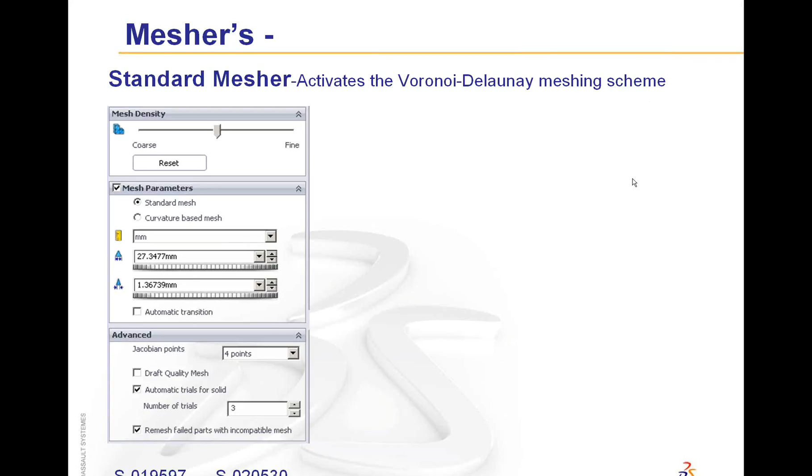To start with the standard mesher, it has a certain algorithm, it has certain parameters which a user can give, using which it will start meshing internally. Now the software has a logic by which it will derive these parameters automatically depending on the geometry, the kind of mesh used, the kind of loading present.

However, I would suggest users to be more alert on the parameters that have been used by the software. I have seen users using these parameters blindly. They will just click the reset button, accept whatever value comes over here, and mesh the geometry. Yes, it will definitely try to mesh with that particular setting, but a good understanding of these parameters will definitely help you in getting the best quality of mesh, the fastest solutions, and I can say accurate solutions as well.

So to start with, you can see over here, the first parameter is the global element size. This is one of the parameters which has to be given for the standard mesher. This global element size is the average element size that will be used by the meshing solver to mesh the complete geometry. By default there will be a calculated value. However, I would suggest a user to browse through the model, find out the different thicknesses present in the model, and arrive at a good element size.

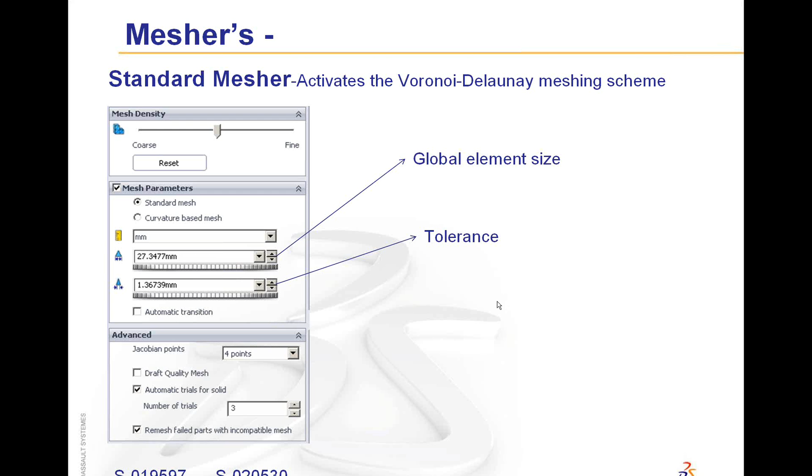So before I move on to the next slide, give me a moment. Give me a moment. I'm just browsing through the questions so that I have not missed out on any critical thing. Those questions which I can address at the end of the session, I'll keep them for the end of the session. However, if anything is important, I would like to address it now.

Okay, nothing that I need to hurry up. I can address the questions at the end.

So we have seen the global element size, the tolerance. Now let's move on to an interesting option which is called automatic transition. You can see it is present over here. Selecting this checkbox

is going to tell the solver to attain a certain quality of mesh in the sharp regions, that is wherein there are radiuses, small fillets, small elements. It will try to mesh those features with a better quality of mesh or smaller element size automatically.

Now give me a moment. There is a question which I would like to address before I go on. Just a second. Something wrong? And then a mistake in the slide that was shown on the screen, hence I'm just checking it. Just a second. Okay, now it's in place.

Automatic transition. Now this is a very good feature which will definitely mesh the intricate features automatically with a good quality of mesh. For small geometries, small parts, even I can say to some extent assemblies, it is a very good feature. But if there are too many intricate features in the geometry and we are not interested in stresses or deflections at all those features, then I would suggest unselecting this checkbox.

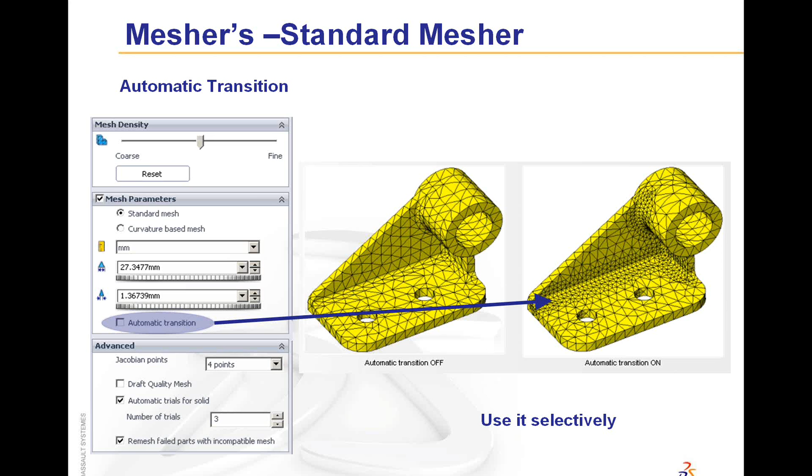We have seen that the selection of this checkbox can also lead to a mesh failure. Hence, the first thing that I would suggest when you see a mesh failure is to unselect this checkbox. Later on, you have options which I'll discuss in this presentation, using which you can attain a good quality of mesh at the intricate or the necessary regions.

However, this is going to set the setting at the global level. Hence, if permissible, neglect it.

So any questions at the moment? I don't think so. Yeah.

Let's move on. At the moment, we have two different qualities of mesh. One is called the draft quality of mesh and the other is the high quality. When we select the draft quality of mesh for shell elements, as you can see in the image over here, it will show you the three-noded shell element, triangular shell element. We call it draft quality. There are also different words like linear element. So names are different, but ultimately it will be having only 3 nodes.

Apart from that, when this option is not selected, the quality of mesh will be called high quality, and that is also called a parabolic element. So if it is a 2D element, then it would look something like this. If it is 3D, a tetrahedron in shape, then you can see it will have 4 nodes at the corners of the tetrahedron. And if it is high quality, it will have mid-side nodes at the edges of the tetrahedron.

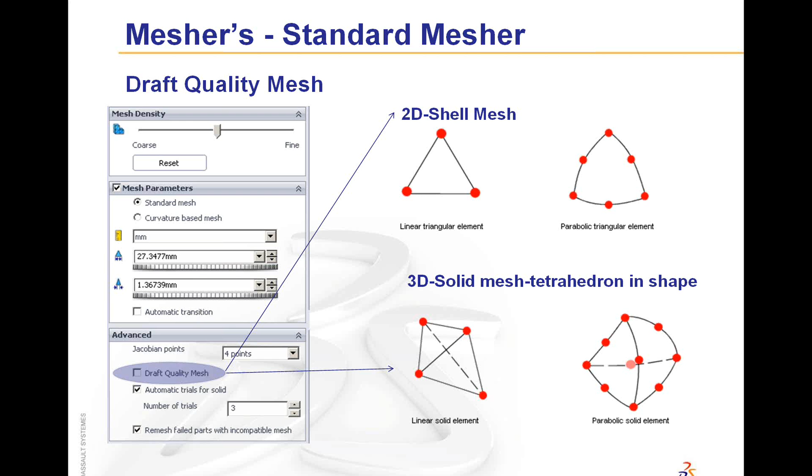But for accurate results, it is suggested to go with parabolic triangular elements. It is going to increase the degrees of freedom. However, it will assure that the quality of results is very good. Also for curvaceous geometries or geometries wherein there are enough radiuses, fillets, etc., I would suggest using the parabolic triangular elements. But it's not a rule of thumb. For initial analysis, go ahead with the draft quality of elements. If we conclude we have done the right setup, then move on to the high quality elements.

Moving on to the next option, that is automatic trials for solids. This is a very good option which will help you in case of mesh failures. If you are not sure of the element size that is going to mesh the geometry correctly, then this option can do it automatically through the software. Initially, either the software sets, or we can manually set, the global element size and the tolerance. Using this option, automatic trials for solids, we can set a certain number of iterations using which the software will iterate with different element sizes to attain the mesh.

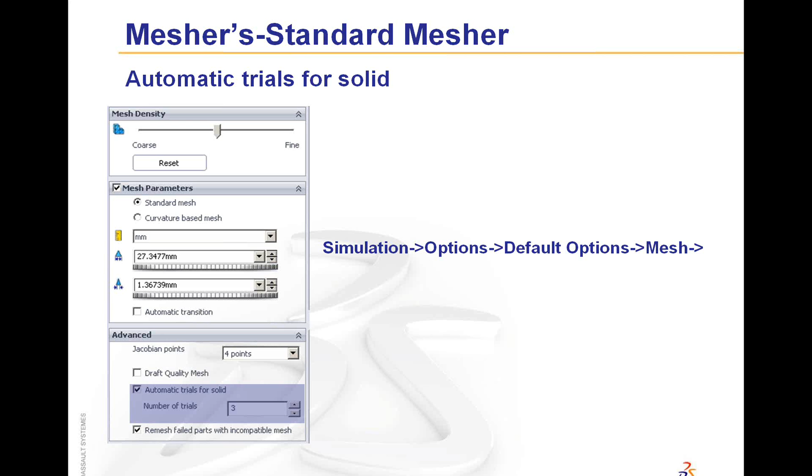Now, by default, in the property manager of the mesh, you can see we can specify the number of trials. Apart from that, if you want to specify what would be the change in element size or the change in tolerance, then you can do it through Simulation Options, Default Options, Mesh. We can see it over there.

Over there, we have the option of global element size factor for each trial and the tolerance factor for each trial. So if an element size of 25 is set over there, 25 cross 0.8, the reduced element size would be used for the next trial. So going ahead, we can just set that option and the solver will do the meshing accordingly.

So this is a very good option in case of automatic iterations for the mesh. Any questions at the moment on this particular thing? I'll just browse through it.

There is a limit on the number of trials. The maximum limit is 10, and yes, obviously it is going to take a bit of time. Every iteration will be done, hence it is going to take a bit of time when this option is selected. However, if there is an intricate geometry wherein you are not able to conclude on the mesh size, use this option and the solver will do the meshing for you.

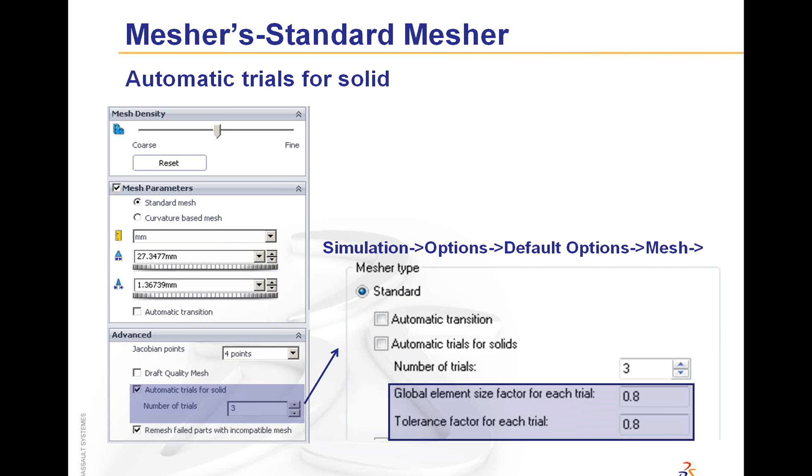Now, obviously, compatible mesh is more accurate than incompatible mesh, especially when we are seeing the results at the junction. But seeing it from a meshing point of view, compatible mesh can lead to mesh failures, especially if there are two parts of exceptionally different sizes. One of them is too big and the other one is too small. Then I would suggest using the incompatible mesh in that case.

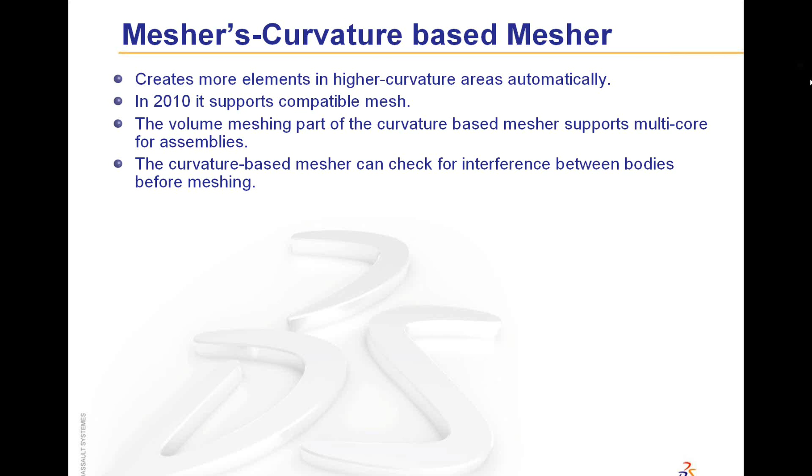Curvature-based mesher can check for interferences between bodies before meshing. So if it finds any interferences in the geometry, or rather the assembly, it will stop meshing and give the necessary warning. This is useful for a user who is not caring about interferences, where the problems come while solving the geometry. Of course, this check will happen only if bonded contact has been given, whether at the global level, the component level or the local level.

Now, the important parameters based on which the curvature mesher will do the meshing. Because this is a VAR webinar and I have seen users coming up with funny questions, I don't want to miss out on one particular observation. I have seen users practically copying the settings from standard mesher to curvature mesher. They'll just click the different radio buttons and copy the size. The first size here is maximum element size; over there it was average element size, do not miss out on that. The second is minimum element size, whereas over there it is the tolerance.

I have practically seen users who copy the tolerance from standard mesher to the curvature-based mesher and try to mesh it. So I would request you all not to be blind on the parameters that are present here. Try to have a better understanding of them. Definitely it will help you in a bigger way. So the parameters here, maximum element size and minimum element size, I think nothing much to explain there. It defines itself.

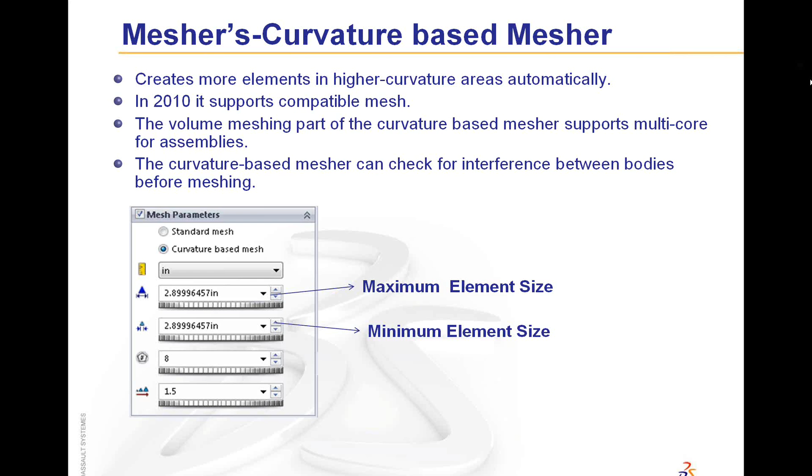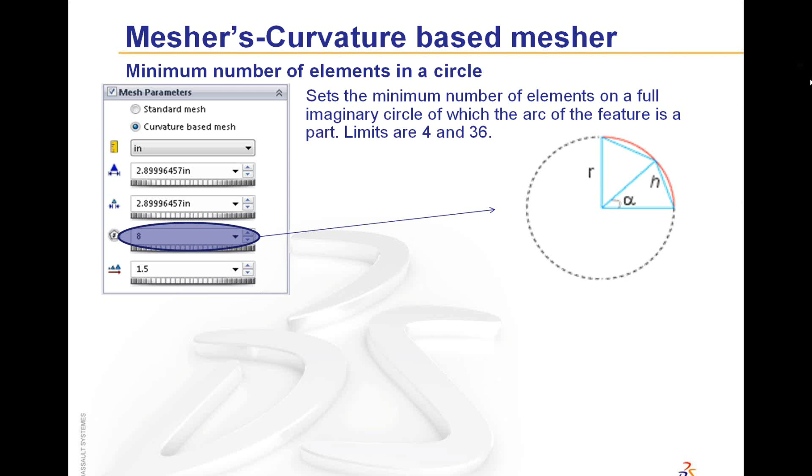Moving ahead, a very interesting and different parameter is minimum number of elements in a circle. This parameter sets the minimum number of elements on a full imaginary circle of which the arc of the feature is a part. You can see the red line on this circular diagram. That red line is the part of the geometry. Now this value, that is 8, defines the number of elements in this complete circle. The limits are 4 and 36.

If we set the value to 8, then it is going to try to attain 8 elements in this imaginary circle, and in short 2 elements in the red part of the circle, the practical feature present here. This in turn leads to an angle of 45 degrees there. The diagram should be clear in explaining that. H, the arc length, can be calculated through S equals R theta. Here it comes out to be R alpha, which is H, the element edge length.

So for this option to come into effect, the H value should lie between the maximum and the minimum element size that has been specified. This will ensure a certain quality of elements is attained throughout the geometry. This will also ensure that enough elements are created at curvature. So this is a very different, intricate option. Try to play around with it. That's all I can say at the moment.

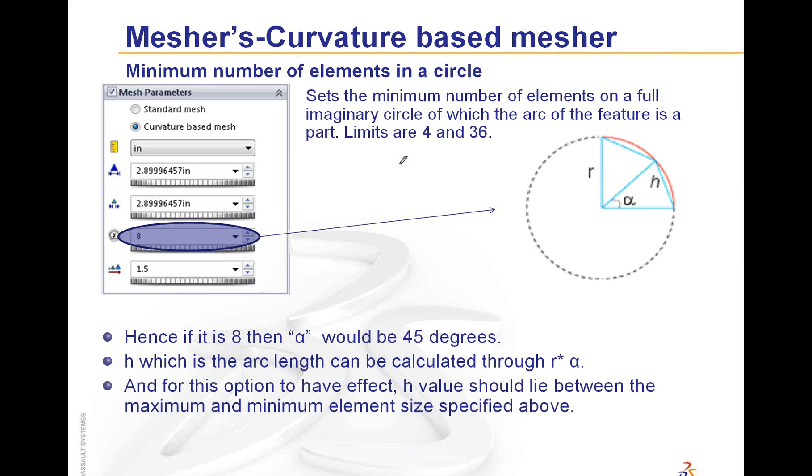Okay, I'll finish this and let's see the questions. Very simple option, element size growth ratio. We are specifying the minimum element size and the maximum element size. This ratio, the element size growth ratio, specifies how the variation will be between these two element sizes. So I think it's pretty self-explanatory.

Any questions? I'm just browsing through the questions. Give me a moment. I have two questions. As I told you, for Jacobian points there is a slide on it. I'll discuss it once that comes up.

How do we set the minimum element size? This is a very good question. There is no formula for setting the minimum element size. Browse through the model. I'm going to discuss a few tools by which you can find out small features in the geometry. These tools are going to tell you the small features that are present in the geometry.

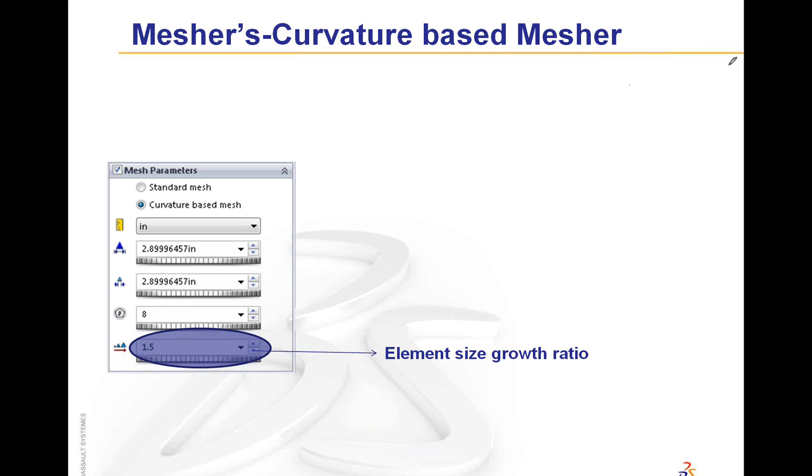Let's move on to solid mesh. There is nothing separate to discuss here. We're going to use the two existing meshers, play around with different parameters and try to attain the mesh. There is nothing separate or different to be done over here, so I'll not be discussing much on it.

Moving on to shell and beams, there are a lot of things to discuss. Before we start with shell and beam elements, we need to realize that beams and shells are an approximation to real life. They are not the 1:1 entities present in the true geometry or the practical part. Yet sometimes there will be an expectation where a user wants the same results as a solid element. No, it has its own work. There are reasons for optimizing a solid mesh to shell or beam mesh. Understand that, and go accordingly.

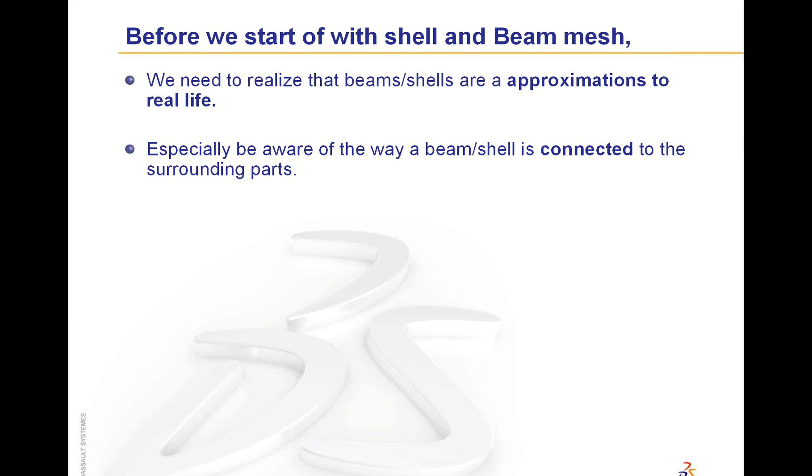Especially the points to be considered would be the way beams and shells are connected to each other and to a solid geometry. Give a thorough thought on how they are connected, what exactly a beam mesh element representation does, how the joints are connected, how the shell end is connected to a solid, etc. Be attentive to these things, try to understand them. That will give a better understanding of shells and beam mesh, or a better interpretation of the results we get from them.

The cross section of the beam is taken into account when calculating beam properties, but when bonding to a shell or solid, it is the line that is bonded to a surface, not the cross section. For a non-analyst, this might seem odd - why are we doing it this way? But that's the way it is. The physical properties or strength of the beam is considered, however it is not the beam cross section that will be considered. This is the way almost all FEA software works. The ease of use in SolidWorks simulation makes it feel like it shouldn't be that way, but be aware of these things. Once you are aware, you will be able to handle them better.

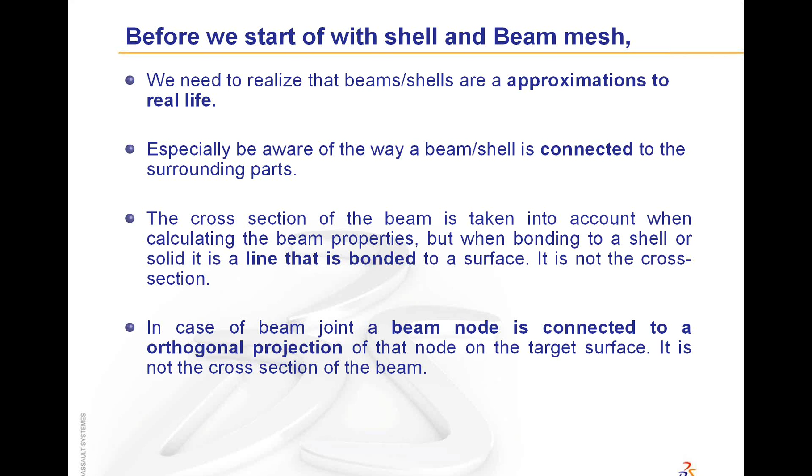In case of beam joints, a beam node is connected to an orthogonal projection of that node on the target surface - again, not the cross section of the beam. I cannot call this a limitation, but this is the way it is. If the user is not okay with this and wants more accurate results, there is no way out but to use the solid mesh as it is.

Before I start with the shell mesh, I want to go through the questions. Any other element apart from tetrahedron high quality mesh?

Two questions now. Where specifically should you use curvature based mesh? You could see a few distinctive features present in both meshes. I won't say use this mesher here and that one there, but if it's a curvaceous geometry, a large assembly with many parts, and you want multi-core processing, then curvature mesh based mesher is going to do a better job. Comparatively it's a newer mesher - standard mesher is older and has been present for quite some time with SolidWorks simulation. However, this new mesher is doing a very good job, and the big limitation of compatible mesh is no longer there. I think in almost all cases you can try curvature based meshers, nothing wrong with that. But there is no specified rule saying use standard mesher for this and curvature based for that.

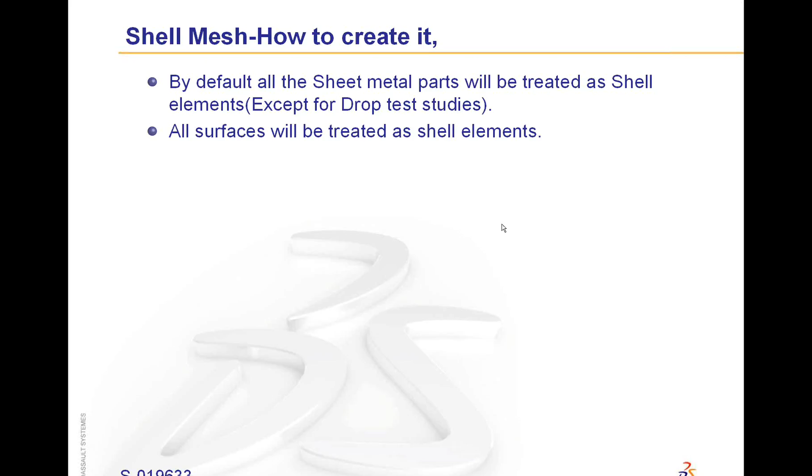Well, shell mesh—how to create it? Very simple. By default, all uniform sheet metal parts will be treated as shell elements, except for drop test studies. All surfaces will be treated as shell elements. Now, when I say by default, when we are creating a new study, automatically those parts or features will be treated as shell elements. So try to understand this.

A few users might also observe that when creating a new study in either the 2009 or 2010 version, you'll see a bit of time taken unlike before. The reason is it is browsing through all available parts to do this conversion automatically. Previously, the user had to do it manually, whereas now it's automatic—hence you might see an increase in time while creating a new study, but nothing to worry about. It's a one-time activity and helps the user in a big way. All the things are automated because of that.

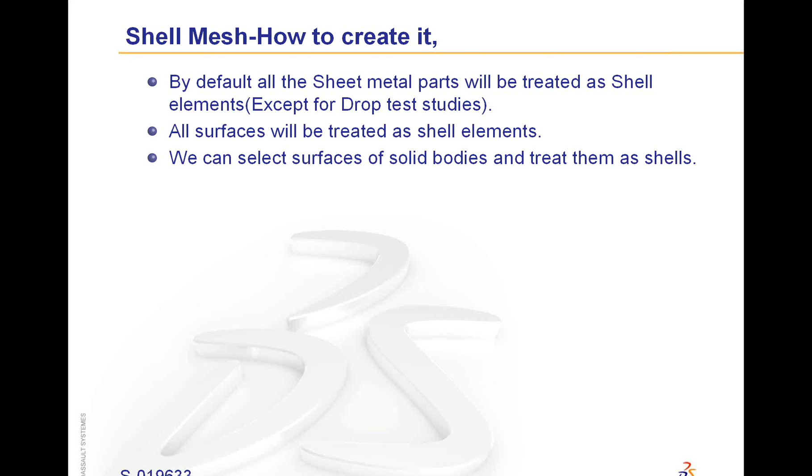Apart from that, we have a feature—first let me discuss what this feature is. We can select a surface from a solid body and treat it as shell. How to do it? Just select the solid feature which has been automatically created, right click on it, and you'll see the option 'define shell by selected faces.' Using this option we can create a set of surfaces to be treated as shell mesh.

This feature was present in the previous version, 2007-2008. However, in 2009, when we fine-tuned the front end so that only sheet metal parts would be treated as shell elements, it was removed for certain reasons, as it was perfect automation. We had given enough features in SolidWorks wherein parts could be converted to sheet metal parts, or solid parts converted to sheet metal parts, and later used in simulation. However, due to popular demand and requests from different users, this option has been reintroduced in 2010.

So if a user wants to treat a certain surface of the solid as a shell, he can use this option. Automatically the solid feature will be excluded from the analysis, and the shells will be active in the analysis. And the measures remain the same as those we have already discussed earlier.

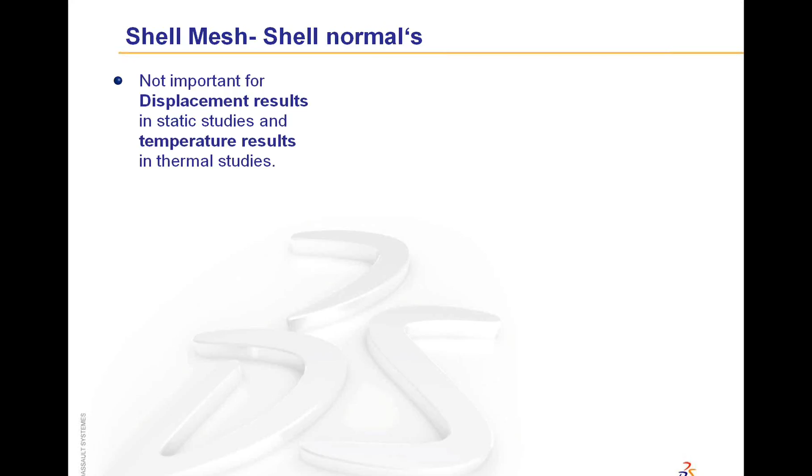Now, a very critical and important thing for shell mesh is shell normals. Do not miss out on it. However, if the user is interested only in displacement or temperature results of thermal studies, this option may not be that important. Whereas if stress results are important, do not miss out on this option, or rather, the behavior and way the mesh is created.

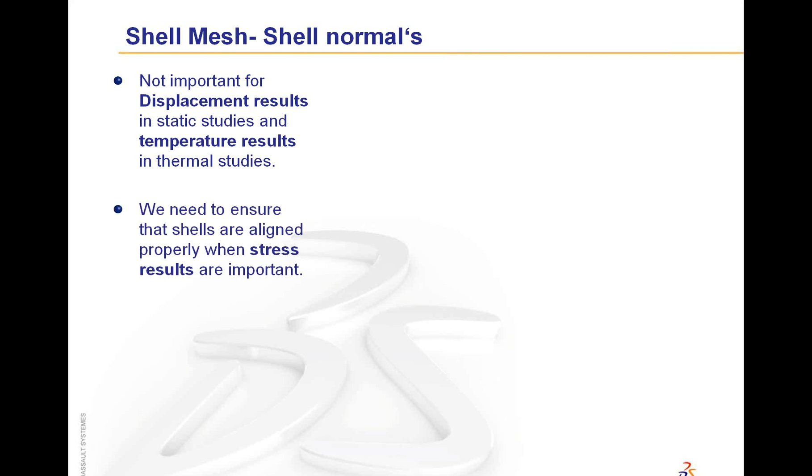By default, the software will align the shells properly if the option under simulation options, default options, automatic realignment for non-composite shells is selected. By default, the software will do our job. However, a user is suggested to browse through the model and check if all the shells have been aligned properly. This option will also take a bit of time. I have kept a different slide for that, and I'll discuss it in detail. However, at the moment, it will do it.

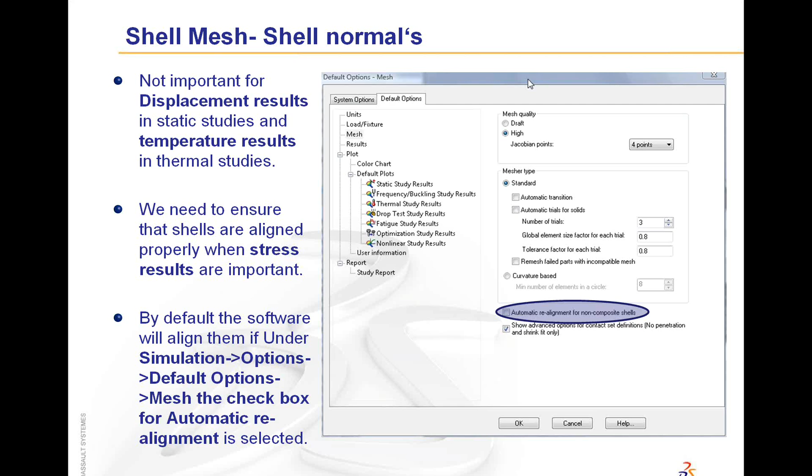In any case, if the shell is not aligned properly and a user does not want to use this option but wants to do it manually, there is an option by which we can select a certain surface, right click on the mesh, select the flip shell elements option, which will flip the necessary shells and align the shell normals properly.

Now obviously the basic question would be which direction is the top surface of the shell. Orange color will represent the bottom face of the shell, and this is the default option. However, the user has the option to change the color. It is again present in simulation options, system options, mesh color. So do not miss out on this option. Whenever there is shell mesh present in the study, ensure that the shells are aligned properly.

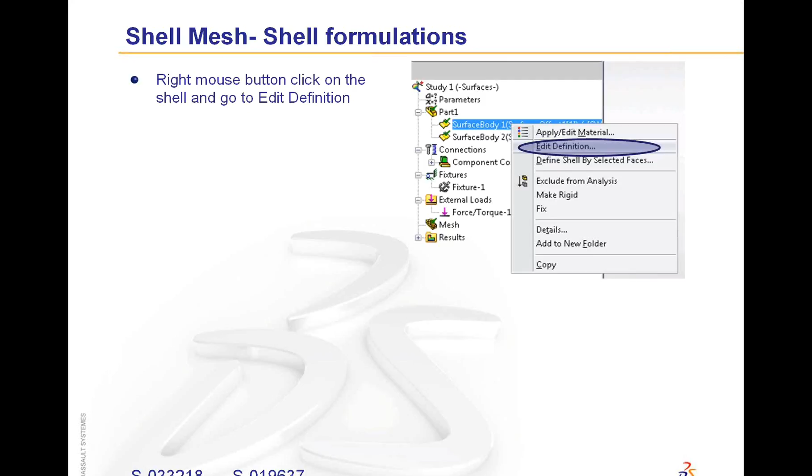Moving on, shell formulations. Now this may not be a pure meshing thing, but yes, this has to be considered while meshing. Hence I am covering it in this presentation. When you edit a particular shell that has been defined, you'll get different formulations. One of them is thin shell formulation, the other is thick, and finally composites.

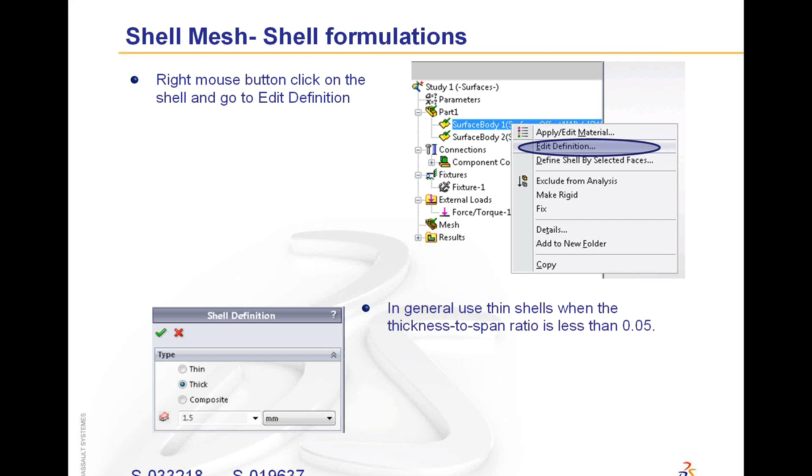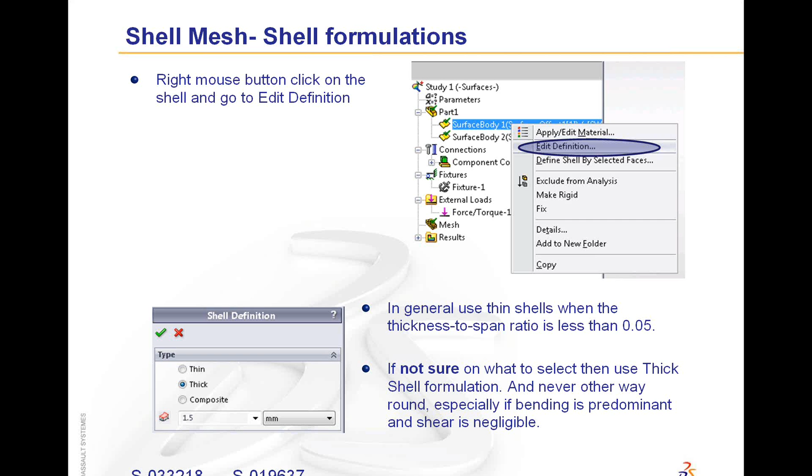So in general, use thin shells when the thickness to span ratio is less than 0.05. Be aware of this, thickness to span ratio less than 0.05. However, if a user is not sure if the thickness is more than that, then go ahead with the thick shell formulation. If he is not sure and does not know which to select, there is nothing wrong in blindly selecting the thick shell option. For more details, browse through the solution; there are enough theoretical things over there that should be of use to you.

Moving on, the third formulation, which is composites. This again is a very big chapter. I am going to discuss more on the application part of it, or the options that are present here. It can take me a complete hour to discuss composites in detail. However, be aware of a few things and you can start off using it with these options explained.

It is available in static, frequency and buckling studies only. To start off with the different options when we select composites under shell definition, the first one is the sandwich option. Here you can see that by default the shell is considered to be having 3 layers: the central layer which is the core, and 2 skins present on this central layer which represent the composite. I will not go deep into it; there are many things to be discussed, but that's what I'd like to say at the moment.

We can define the number of plies, or if not, when the sandwich option is not selected, you will get this option of total plies, where we can define the number of plies that you want in the composite shell. Moving on, the symmetric option lets us specify the number of plies and whether they are symmetric with respect to a central layer or not. If not symmetric, there can be variation of thicknesses of the layers on both sides of the central layer, or even variation of the material properties.

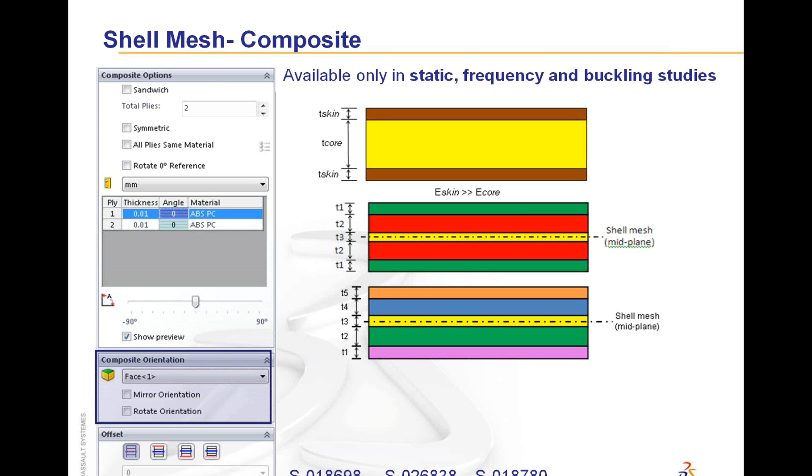Moving ahead, composite orientation, that is just now what we discussed, the shell normal thing. Either they are oriented on the positive Z direction or the negative Z direction. We can set it over here. And finally, the offset, that is the location of the mid-plane. Either it can be at the middle, top, bottom, or we can specify a fraction of the total thickness measured from the mid surface to the reference surface, using which we can specify the location of the composites.

Now I have covered almost what I should have discussed in 1 hour in 2 minutes. However, that's what it is. Solutions should help you. Do not miss out on those solution numbers.

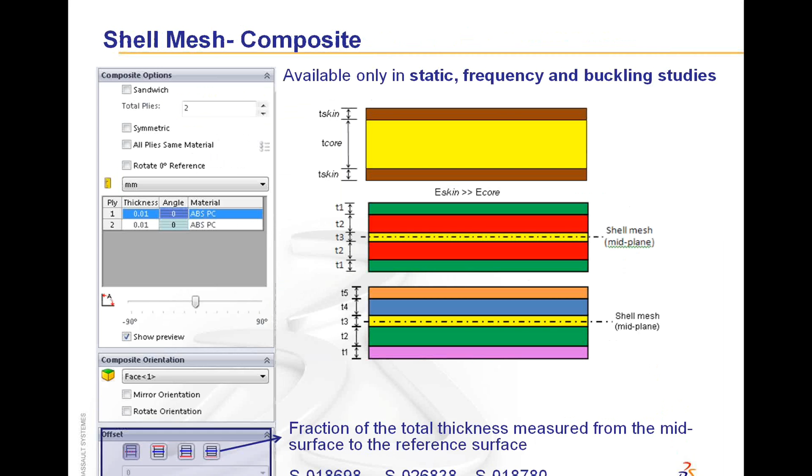As I told you, for composite orientation, the shell normals are very important, especially when we are setting the composite orientation tab over here. Ensure that the shell normals are aligned properly for composite elements. Rather, if composites have been used, then ensure that shell normals are aligned properly.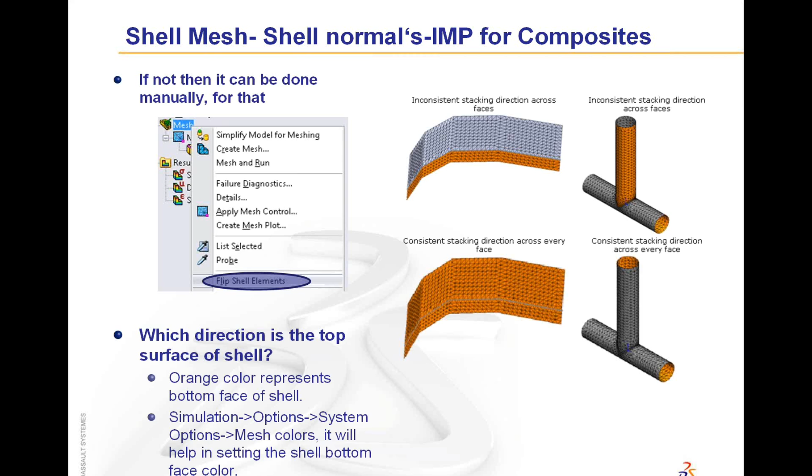So moving ahead, the next type of element, beam mesh. Now again here, by default, all weldments will be treated as beams. Beam elements are supported for static, frequency, buckling, and nonlinear studies. Nonlinear is an addition in 2010. Large displacement solutions in static studies are not supported for beams. There is no separate control on the way the mesh is created. That is, we don't have any mesh controls, element size, etc. The software will do it on its own.

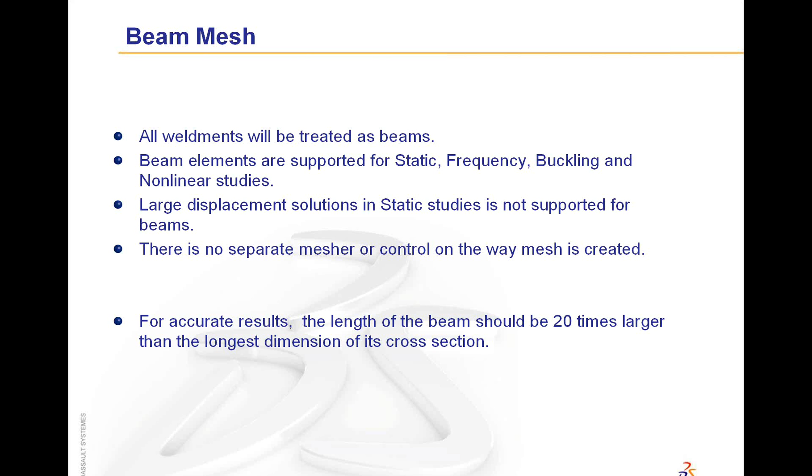Now moving ahead, this is more of a theoretical concept, but we do not want to miss out on that. For accurate results, the length of the beam should be 20 times larger than the longest dimension of its cross section. So do not miss out on that. That does not mean that we cannot have beam elements with smaller length, but this is also a reality.

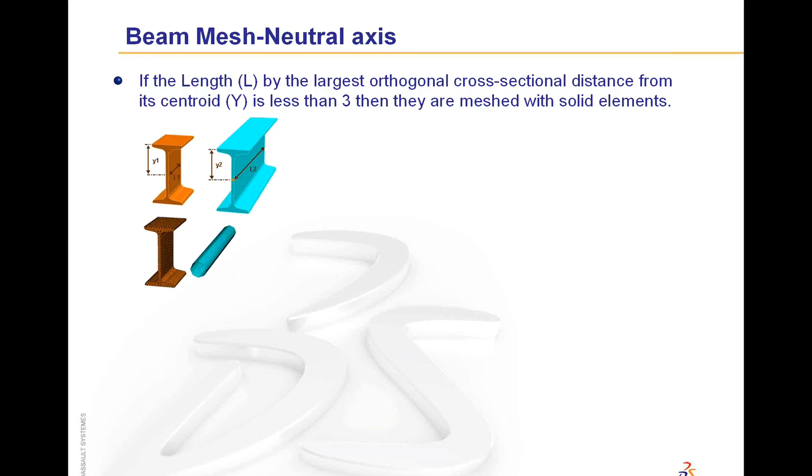Now again, when we are speaking of by default and when the software converts beam elements to solid mesh, in the 2006, 2007, 2008 versions, etc., it was left out and automatically all elements were converted to beam elements. However, from 2010 it has been very well fine-tuned, and by default, if the length divided by the largest orthogonal cross-section distance from its centroid, Y, is less than 3, then they are meshed with solid elements. So by default, when we create a new study, any such combination wherein the L by Y ratio is less than 3 is treated as a solid element.

However, that does not restrict the user. If a user in whichever case wants to treat it as a beam element, then he is free to do it. Obviously, the software will face problems wherein it does not know. Now I have taken an example of a perfect cube. There is no chance the software can know which should be the direction of the beam element. However, we can treat it as a beam element, and when we right click on the beam, there is an option called define beam neutral axis. Using this option, we can specify the direction of the neutral axis. So even with all the restrictions present, if a user wants to move ahead with a beam mesh for a certain kind of solid, then he can do that.

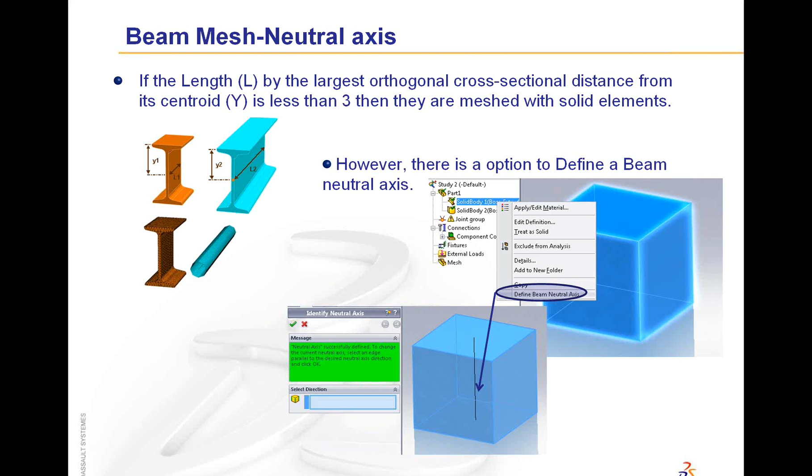Beam properties: when we right click on the beam, we have the edit definition option, which will permit us to give the beam properties. The beam can be treated as a beam or it can be treated as a truss. Beam will have 6 degrees of freedom and truss will have 3 degrees of freedom, that is translations only. Apart from that, if we have selected the beam option, then we have the option of playing around with the end connections, wherein we can say it could be rigid, hinged, sliding, or we can do it manually also.

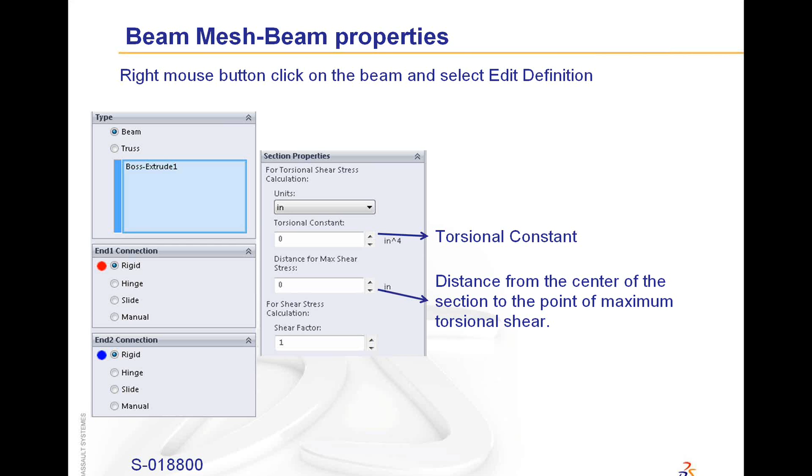Apart from that, from 2010, if a user wants to study the torsional behavior of a beam, then we have more properties which can be given, using which we can check the torsional stresses and deflections. However, it needs certain inputs to be given for beams. One of them is the torsional constant. The below solution should be useful in understanding these parameters in more detail. Distance from the center of the section to the point of the maximum torsional shear. And finally, the shear factor, the ratio of effective area under shear to the beam's cross-section area.

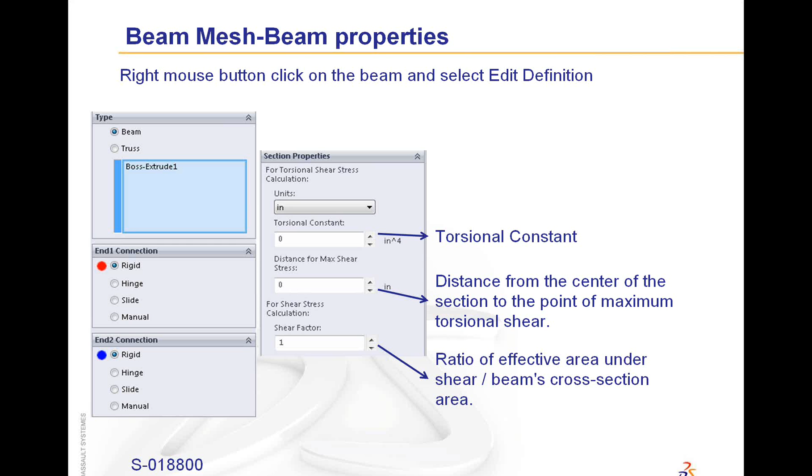So we need to specify these parameters if a user has to study the torsional behavior of the beams as well. Finally, solids, shells, beams. A user wants to mix up all those things; rather, almost all intricate assemblies will be this way, and a bit of discussion on that thing.

As I told you, on creating a new study in an assembly, and not only assembly, it is true for a multi-body part as well, there can be a multi-body part with surfaces, solids, and weldments as well. So by default, all sheet metal parts of uniform thickness will be treated as shells. Also surfaces, there is no choice for surfaces. All surfaces will be treated as shells. Weldments will be treated as beams. Exceptions, we have discussed already in the previous slides. All other parts will be treated as solid.

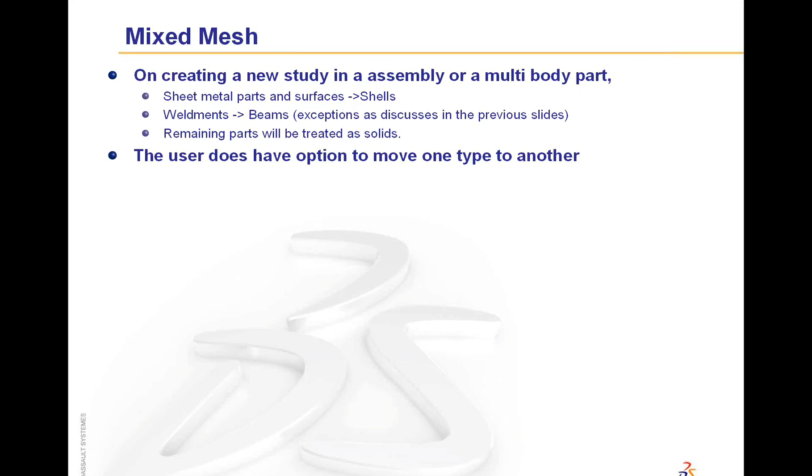Now this is what the software does on whatever understanding it has. However, the user has the option to move from one of them to another. Surfaces, nothing much can be done. They will be treated as shell elements. We need to specify the thickness of surfaces. Whereas if it is a shell mesh which has been created from a sheet metal part, then we have the option of treating that sheet metal part as a solid or as a remote mass, or what remains, that is the shells.

Moving ahead, for solids, we can move them to beams, remote mass, or shell. And for weldments, we can only move them to solids. They cannot be treated as surfaces.

Now, give me a moment. I've covered quite a few slides, so I'll check if anything important needs to be addressed immediately. I'll browse through the questions. Give me a moment. Okay, a few questions which I would like to address quickly.

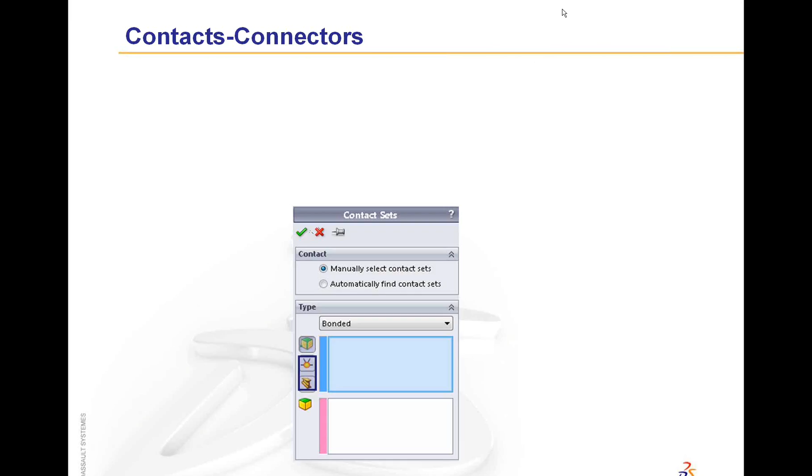Connectors. So as I told you, a very important thing while having mixed mesh is connection between shell, solid, surface, solid, etc. When we are bonding, the contact set manager has an option wherein we can bond vertices, edges, faces, joints, and the complete beam can be bonded to either the surface of shells or solids. Now, frankly, there are a few cases wherein it is not possible to bond, and there were a few cases wherein the software did not warn that this bonding is going to fail and we need to neglect that thing.

But however, I would say in 2010, it has been fine-tuned a lot. The software has enough control on what the user is selecting. It will pop up enough warnings to tell you that this particular connection is not supported, etc. So that's the way it happens. However, it has been fine-tuned enough.

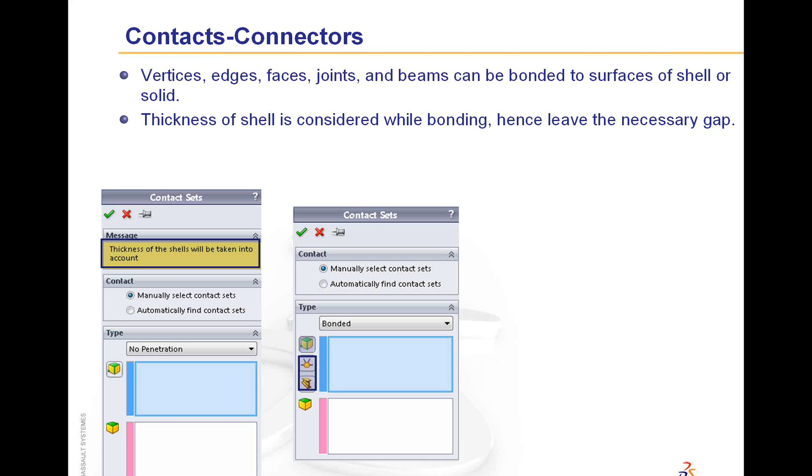Ideally we can connect this set of solid joints, but be aware of a few things wherein the thickness of shell is considered while bonding. Hence, leave the necessary gap. Now, if it is a sheet metal part, obviously that gap will be by default present. However, if it is a surface thing, then that gap will not be present, and a user will be required to leave that gap appropriately.

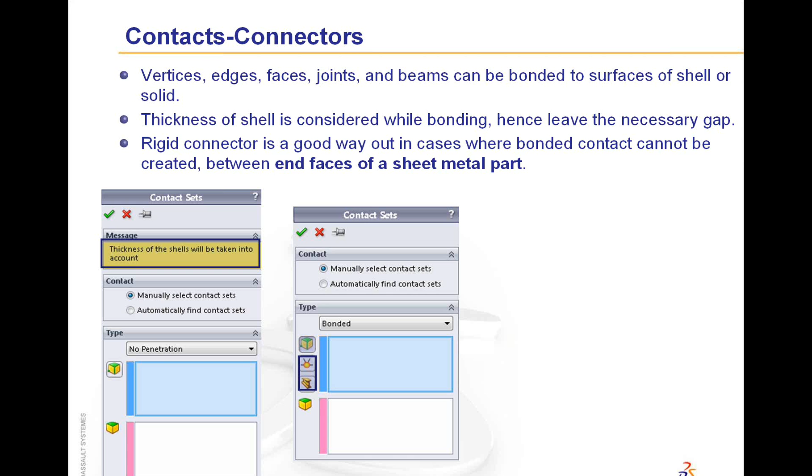Finally, there is a case which I would not miss out on, wherein we cannot connect end faces of a sheet metal part using bonded contact, and I would suggest using the rigid connector over there. That would help you in connecting the sheet metal parts. There are few reasons why the bonded contact is not present, but the rigid connector can take you ahead.

Behavior of the bond: as I told you, contact is very important. Try to see the way a beam element is connected to the solid, etc. The connection is very important there, especially if you are interested in seeing the stress and deflections at those adjoining points. So the behavior of a bond depends on whether the source entity belongs to a solid or shell. If the source is beam or shell, then the connection will be rigid. If the source is solid, then the connection is like a hinge. Solid has 3 degrees of freedom and shell and beam will have 6 degrees of freedom, and hence the connection will be a hinged thing.

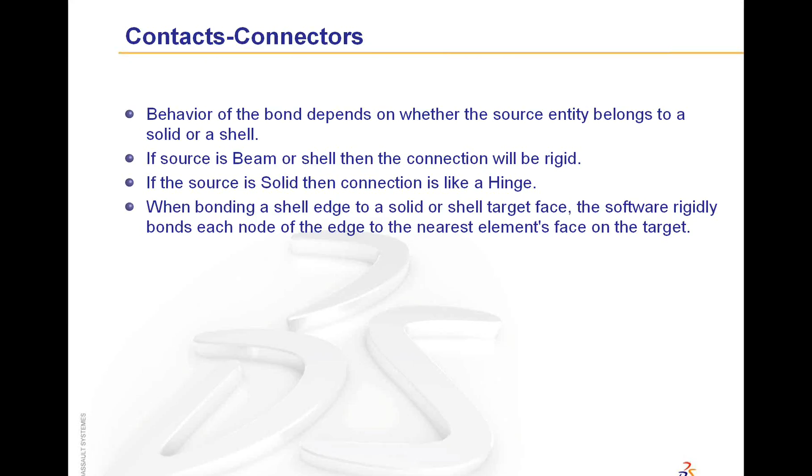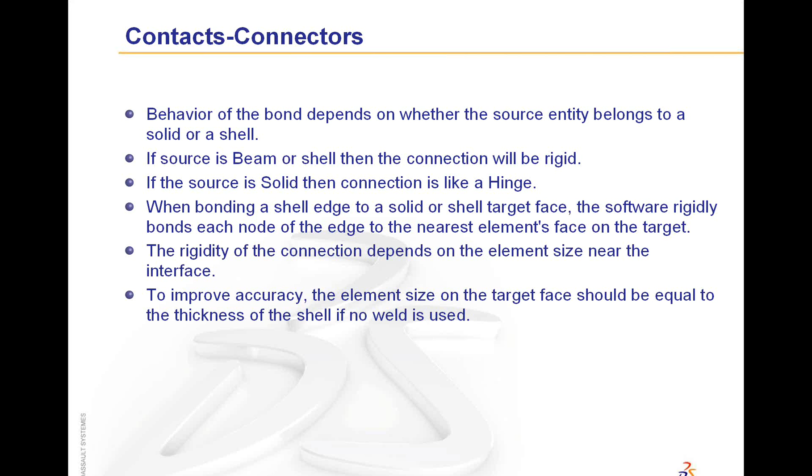When bonding a shell edge to a solid or shell target, the software rigidly bonds each node of the edge of the shell to the nearest element face on the target. So the rigidity of this connection will depend on the element size near the interface. If it is too small, then you might see a few stress singularities at that junction. Hence, it should be at least equal to the thickness of the shell to have more appropriate results. To improve accuracy, the element size on the target face should be equal to the thickness of the shell if no weld is used. If a weld is used, the element size on the target face should be equal to the weld size. Lot of points.

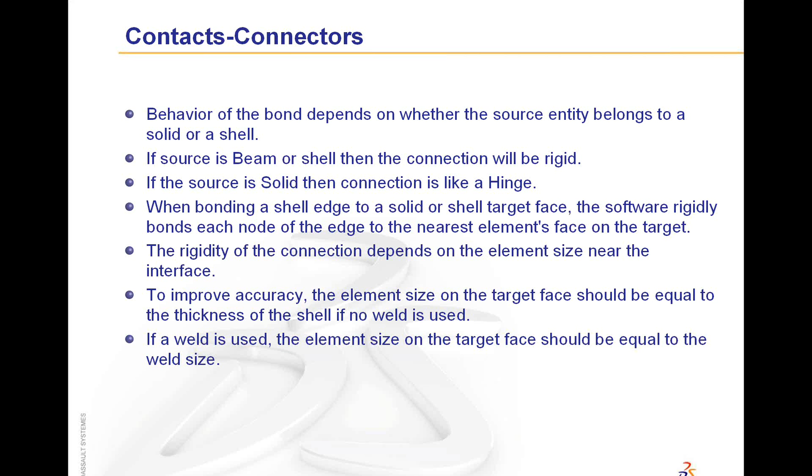I'm sure you'd like to have a look at this slide later on. However, as I'm running out of time, first of all, I apologize. I might overshoot the 1 hour that has been given to me. However, I am sure the slide should be useful to you. I'm going to hurry up now a bit.

Now that we have meshed it, connections are created. A user would obviously be interested in finding out the quality of the mesh that has been created. And we have two options. When we right click on the mesh we'll get the create mesh plot option. That will give us an option to select either aspect ratio or Jacobian check. These two checks have been given to check the quality of the mesh.

It's not specified anywhere that the aspect ratio should be so much only to get the results. However, for accurate results, people try to maintain their elements with an aspect ratio of less than 5, and it is permissible up to 20 as well. So I do not want to put a borderline, but that's what it is.

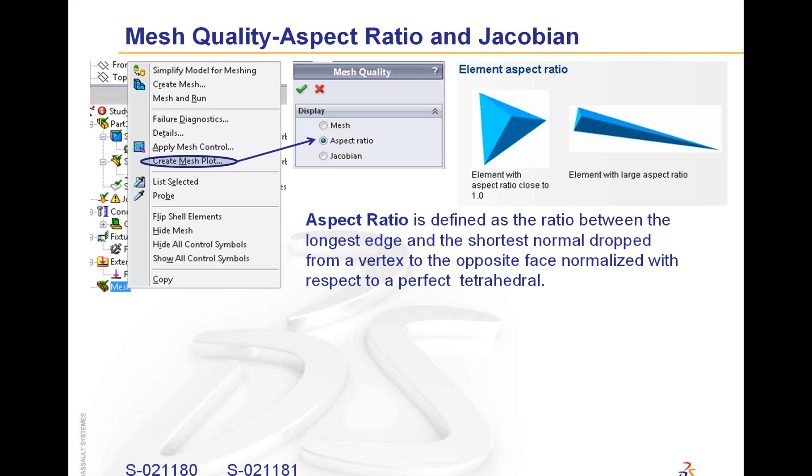And Jacobian measures the displacement of the mid-side nodes and is available for high quality mesh only. The software gives the option to check the Jacobian based on either 4, 16, 29 Gaussian points or at nodes. A negative Jacobian will lead to a solution failure.

Now, this is an interesting thing. By default, the mesher is going to do this job. A user is not required to do much. Obviously, if there is a negative Jacobian, the solver itself will stop. So do not worry too much. You will get the error message.

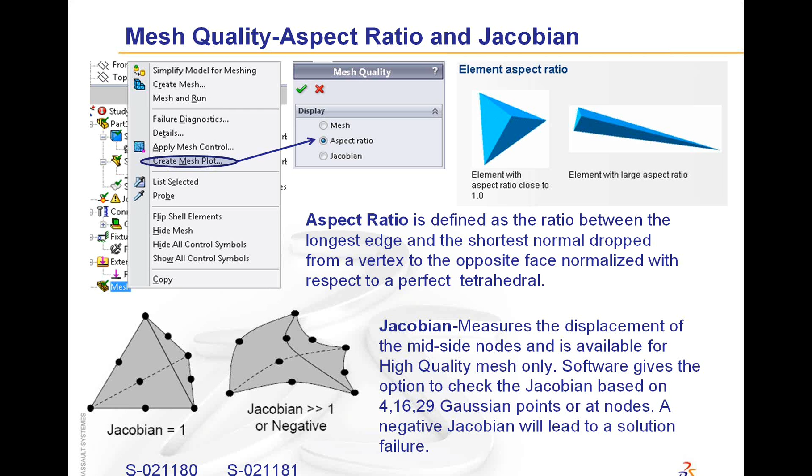And while meshing itself, we have the option of selecting what kind of Jacobian check to use, the number of Gaussian points, or at the nodes. We have the option in the meshing property manager itself. So again, the mesher will do this job. However, we have this option by which we can see the Jacobian variation throughout the mesh, and there are many benchmarks. However, I can say it is permissible to go up to a Jacobian of 40. So that's what it is.

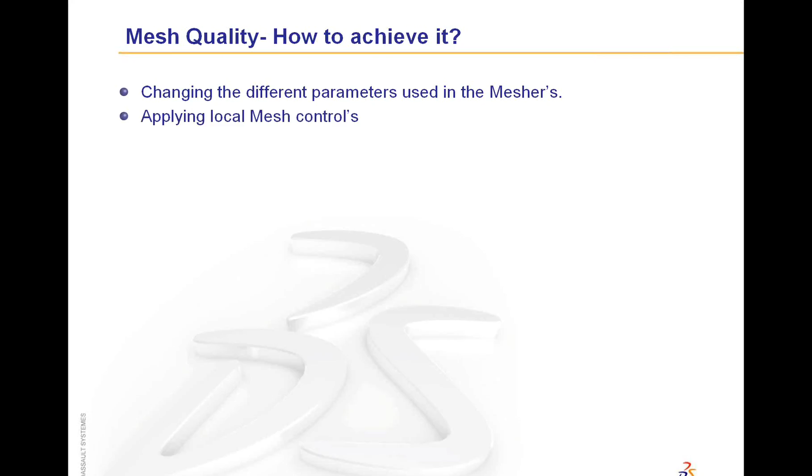Now, if your mesh is not of this quality and you want to improve it, changing the different parameters used in the mesher will help you do that. We have already discussed the different parameters. Apply local mesh controls: we'll discuss it now, wherein we can apply a local mesh control to improve the mesh at that local place only. It is present on right clicking on the mesh feature in the study. You will see the option of apply mesh control. We can apply it on the vertex, edge, surface, or at the part level.

We can specify a different element size and the variation of the elements from that element size onward. And the mesh control can be at the vertex, as you can see over there, or at the edges, at the surfaces, or on the geometry component level. So using these options, a user can attain the necessary quality of the mesh. So that's what it is.

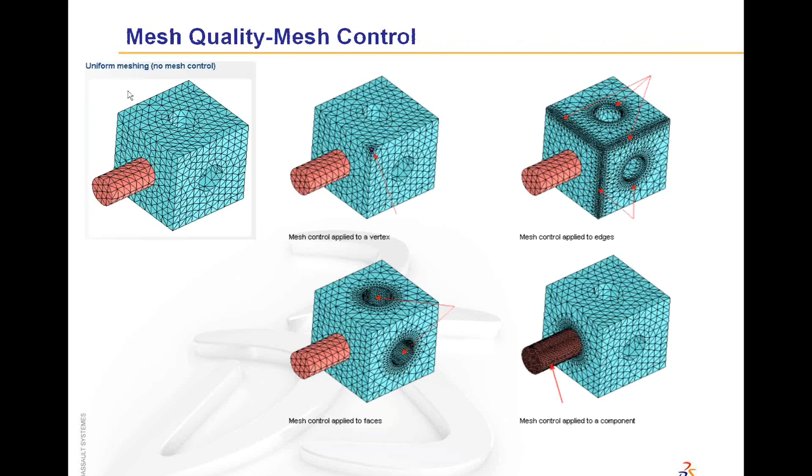Now, the next question would be: okay, I have done the meshing. Is this the optimal mesh? Is the solution time taken too huge? Is this what I should spend on this geometry? Have I attained the necessary mesh convergence? What mesh convergence is, we'll discuss in more detail now.

Any change in a global mesh parameter will lead to a uniform change throughout the model, and hence a huge number of elements if we are reducing the element size. Normally I have seen users who change the element size at the global level only, and that is going to give a uniform mesh size throughout the model, a large number of elements, and huge solution time. Yes, we can do it blindly, but for an intelligent user, I would not suggest doing that.

What he can do is use local mesh controls as discussed in the previous slides. Use draft quality elements and refine the mesh in the localized regions only. Draft quality elements will automatically reduce the degrees of freedom throughout the model, and later on we can apply local mesh controls to refine the mesh in the local regions only.

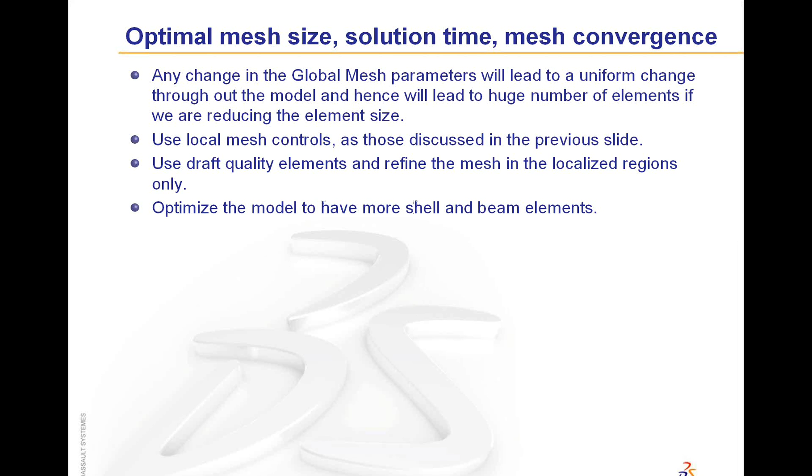Optimize the model to have more shell and beam elements. Now this is a controversial thing. Optimization has to be done based on your experience of the practical results. But for accurate analysis, or if you want a faster, smarter way of analysis, do not miss out on that. Do the optimization of the model.

Finally, mesh convergence. Many people do it normally. This is a graph of element size versus von Mises stress. If I use an element size of 10, it will give a certain stress value. Moving ahead, I reduce the element size and get another stress value. Moving ahead, there is a little increase in stress, not too much. Moving ahead, it has increased comparatively a lot.

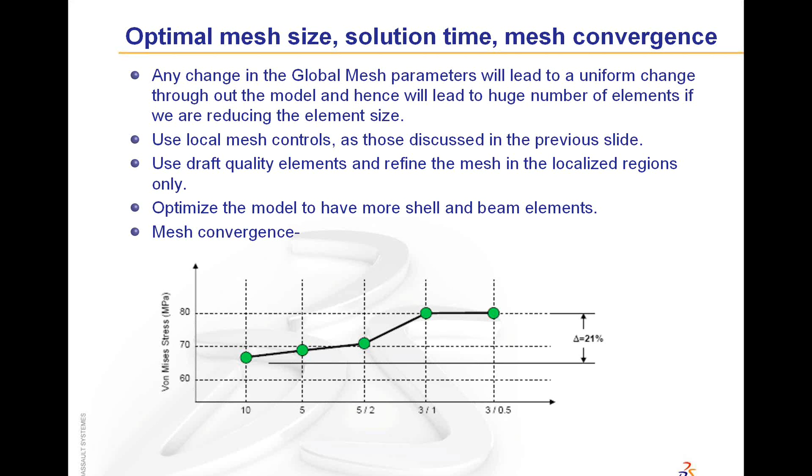So you can see there is a certain amount of variation when you are reducing the mesh size up till this value. However, when we reduce it further, there is no change in the results. So this is the mesh that you want. So element size of 3 is more than enough for your present geometry. Rather, if it is an accurate final analysis, then I would suggest every user to do this one: H adaptive.

Now what we are discussing is how we are going to achieve quality results by using different meshing techniques, or better mesh quality, different controls on doing that. And these two automatic adaptive methods, that is H adaptive and P adaptive, are present at the solver level. You can explore them in more detail through the below solutions and use them to get the necessary quality of mesh.

So what H adaptive method does is it will reduce the element size in regions with higher errors, and we have the option of specifying the accuracy of that error. Set the accuracy level for the strain energy norm. The below solutions will definitely help you in understanding what strain energy norm is. So we can set the accuracy level that we want to attain.

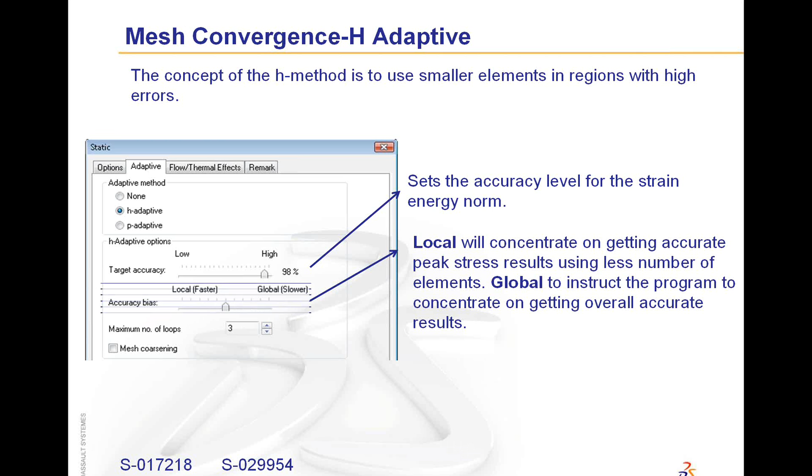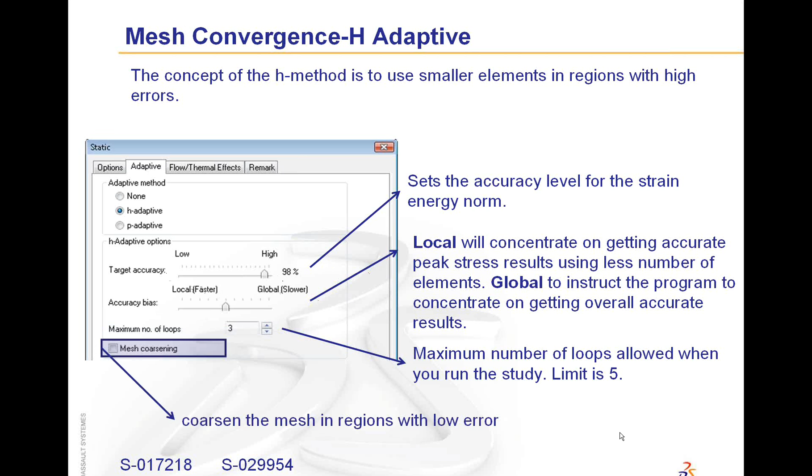We can specify the accuracy bias, that is, either we can improve the mesh at the global level, or we can improve the mesh at the local level only, and this bias is specified over here. We can specify the number of loops. The limit is 5, that is, it can do up to 5 iterations to attain the level of accuracy that you have specified. Apart from that, we have the mesh coarsening option, using which we can coarsen the mesh in regions with lower error and improve the mesh in regions with higher errors.

Finally, the second method, which is the P adaptive method. Now here, no remeshing of the object occurs. However, the quality of elements is improved. How is it improved? The polynomial order used in each element is improved. Again, there are different error norms which we can specify. We have the total strain energy of the complete model. We can select either total strain energy, RMS von Mises stress, or RMS resultant displacement, and set the permissible error. And we have one more control, that is update elements with relative strain energy error.

Now moving ahead, as we discussed, we have linear elements and quadratic elements. These elements can move to a higher order, that is second order up to fifth order. This is the limitation, 2 to 5, and only those elements which are not giving the necessary accuracy will be improved using this method, a localized improvement of the quality of the elements. So we are specifying the starting P order, or the order of the polynomial, the maximum order, and the maximum number of loops.

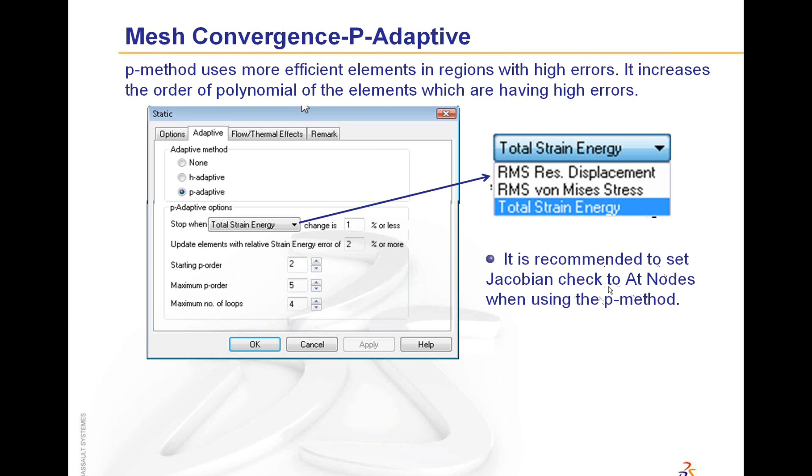Now, a small note over here. It is recommended to set the Jacobian check, which we discussed previously, to at nodes. As I told you, we can specify 4, 16, 29 Gaussian points, etc. We need to specify it at nodes when using the P method, because we have seen solution failures, and instead of facing this problem later, it is better to do it while meshing itself. Hence, set it to at nodes.

A few limitations of the P method. The P method works with solid elements only. Shells are not supported. Beams are also not supported. It does not work with non-uniform pressure, non-uniform forces, or multiple pressures defined on a single face. So that's a bit of a limitation.

Well, when not to use adaptive methods. I should not say this has to be done, or these are the guidelines, but these are a few observations which I have got from the technical support queries that are issued. Sorry. Models with stress singularity. At least do a single analysis without using the adaptive method. If there is any stress singularity in the model, then do not use the adaptive method.

Models with large number of contacts and connectors - obviously, if you are using the H adaptive method in such a case, it is going to shoot up the number of elements that are used.

And I missed out on something. In case of stress singularity, the error is going to increase as the iterations are done. The number of elements will increase, and the mesh convergence will not be in the right direction. Instead of converging, you are diverging if a stress singularity is present in the setup.

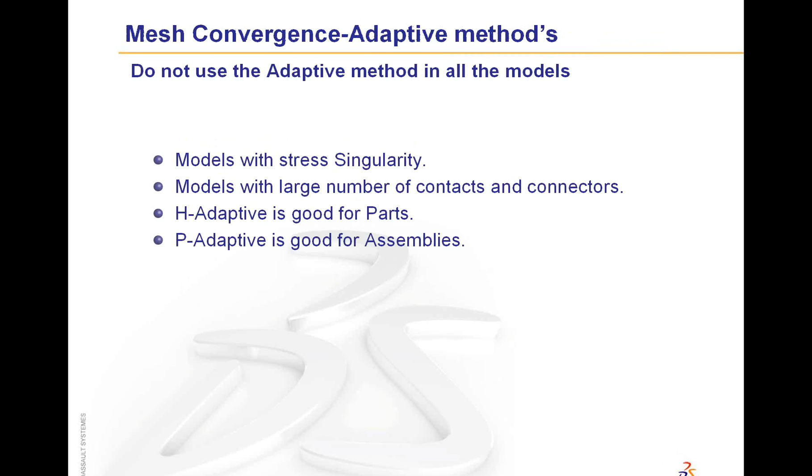So moving ahead, a tool which I do not want to miss out on. Obviously, people want to attain or use the geometry as it is. However, from an analysis point of view, if a certain feature is not going to reduce the strength of the geometry, do not miss out on this feature.

Simplify - when you right click on the mesh, you have this option of simplify model for meshing. Using this option, we can get a list of small fillets, chamfers, holes, extrudes, revolves present in the geometry, and we can either suppress them or create a new derived configuration after modifying these small changes. This helps you have a model with fewer elements, fewer degrees of freedom, and a faster solution without affecting the results.

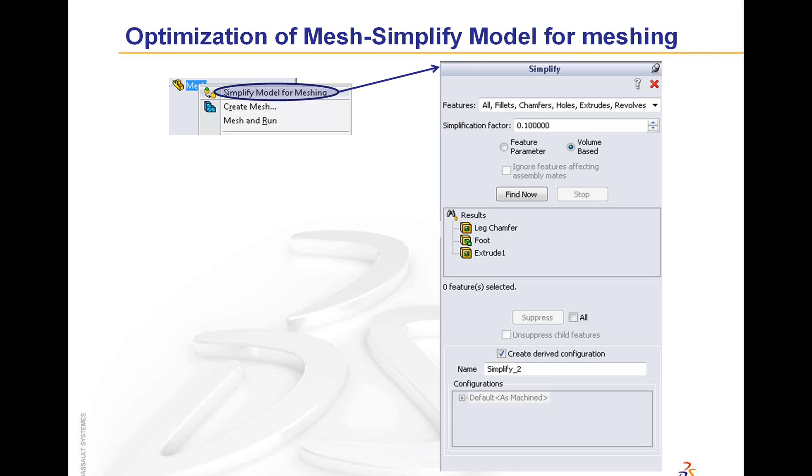Now, obviously, when you are changing something, why is it not going to affect the results? It is going to affect them, but if a user is smart enough, he can play around with the right features which are not necessary and have a faster analysis by simplifying the model.

A few common questions, mistakes, and tips on attaining a good quality mesh and results. There are many things that were in my mind, but I have tried to come down to very few of them - around 4 to 5 - not much, but I would not like to miss out on those things. Give me a moment.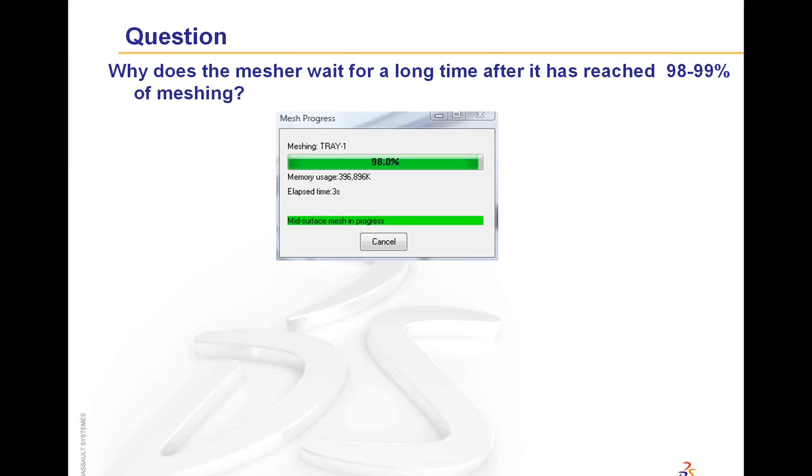First question: why does the mesher wait for a long time after it has reached around 98 to 99% of the meshing? There are many reasons for that. One could be that it is saving the mesh after the meshing is done. However, one interesting thing I don't want to miss is we have seen this behavior in mixed mesh meshing, wherein at the end of the study it will be trying to realign the shell elements, and especially in case of large models, it will be abnormally high.

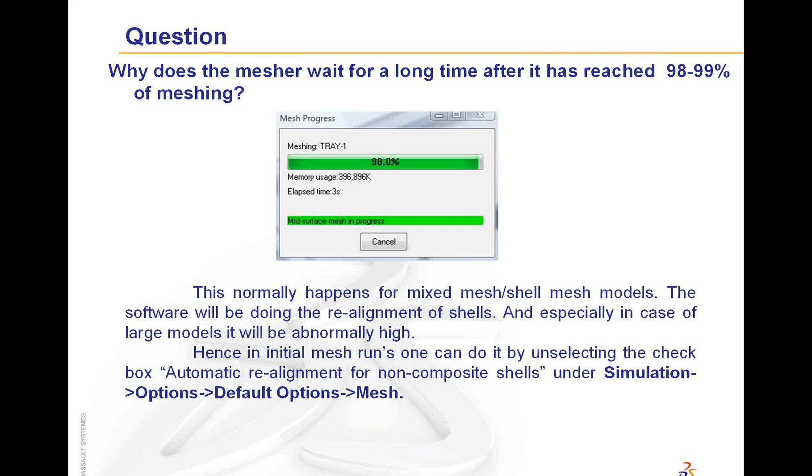So be aware of this and use the automatic realignment option selectively. For large models, there could be cases where no realignment happens, but yet we are wasting a lot of time in this process. So I would suggest unselecting this option - you know where it is, I have already discussed it. Unselect the option, mesh it, browse through the geometry, check if there is really any necessity for realignment, and if only 1 or 2 surfaces need to be realigned, we can even manually do it - I have already discussed how to do it manually.

A tip: mesh fails at the assembly level, however at the part level, all the parts mesh separately. First, check the mesh size used in the parts - when you are using a part and trying to mesh it, check the mesh size used, then try using it at the assembly level. Either use a local mesh control and apply that mesh size at that component, or...

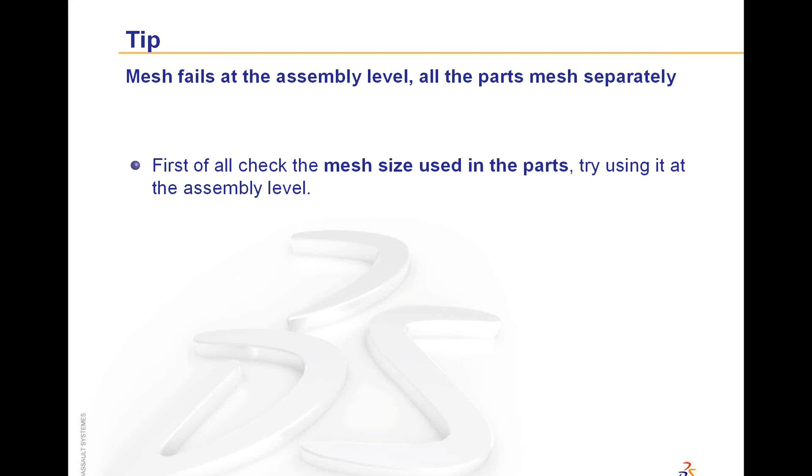...or use this particular option, that is remesh failed parts with incompatible mesh. I have already discussed it - this is a very good option wherein the mesher will do the remeshing with the incompatible mesh. When we move a part from part level into a big assembly, the difference will be the contacts, the bonded contacts, and those increase the complexity for the meshing solvers, which can lead to mesh failures. For relatively small or big parts, use local part level mesh and also use the remesh failed parts option, and that should help you attain the necessary mesh at the assembly level too - provided, as I told you, all the parts are getting meshed at the local level.

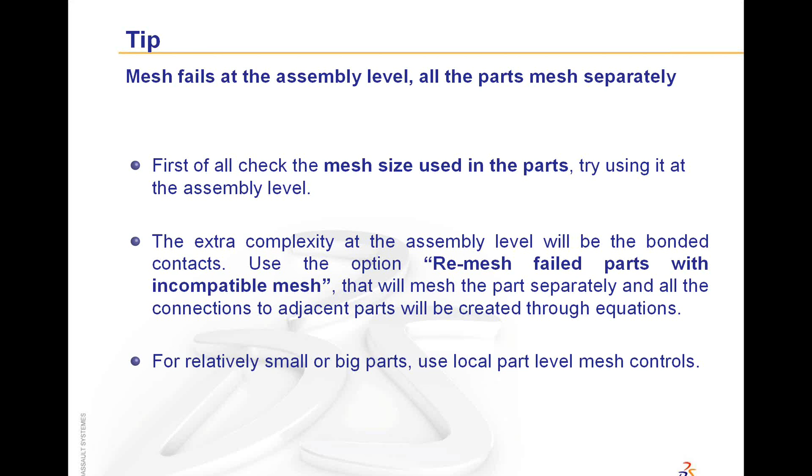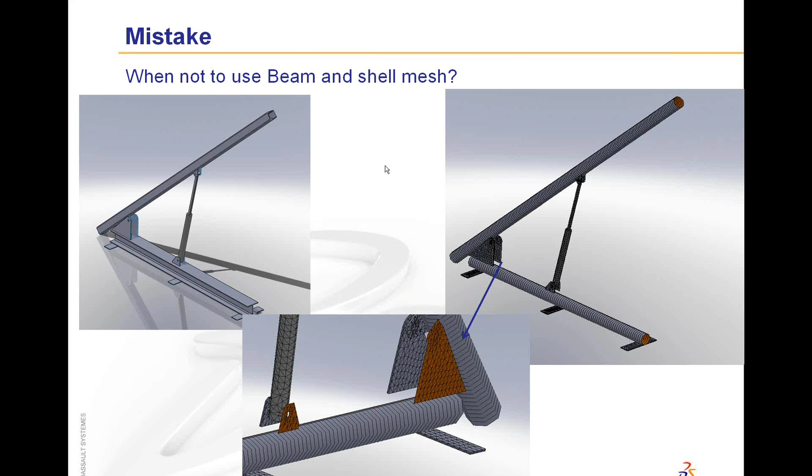However, if the user is not interested in these local things, and is just interested in finding out the overall displacement in the complete model, then this is a good model. So for every given model, do not miss out on doing this analysis - not in the software, but on our part - to check if what we're doing is correct, whether a beam mesh is really required or not, and whether we should go ahead with beam mesh, shell mesh, or solid mesh. Do not miss out on that.

Beam connectors go missing on an update. Now this is a common problem - I may not even say it's a problem, rather the software has given enough good tools by which the beam connectors are created. That's the way SolidWorks simulation works, wherein every beam has two connectors at its ends. If necessary, sometimes because of connections, there will be a few mid-side connectors as well.

When we are moving from a SolidWorks part to a study, automatically certain beam connectors are created or lost. So if it's a small geometry, not a big deal. However, if it's a big assembly, there can be a large number of chances wherein either the number of connectors changes, or the connector numbering changes, etc.

So if there are a large number of beams involved, and any changes are done at the geometry level, I would suggest the user browse through the simulation setup and check if all the loads are attached at the right connectors, and that the connections are good. Of course the software will do its part - it will warn you that a connection has gone missing or the beam numbers have changed, with a warning symbol. However, I would recommend user intervention over these things if any changes are done at the geometry level.

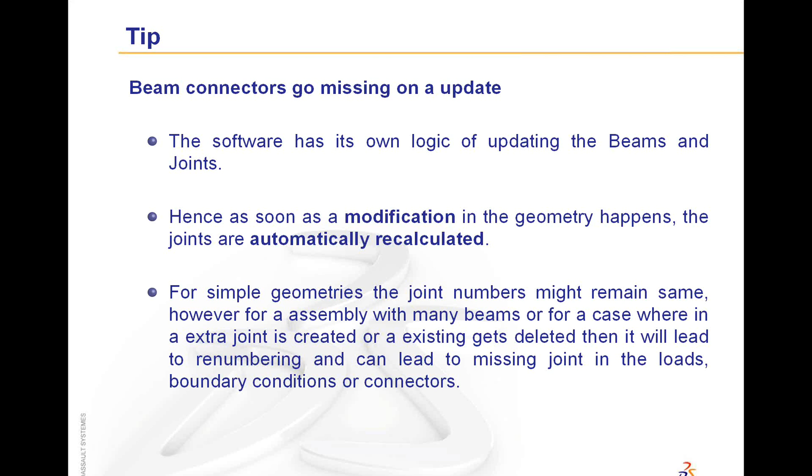Hence, as I just discussed, as soon as a modification is done in the geometry, recalculation happens and we need to check it. Again, for simple geometries it's not a big deal, but for big assemblies, do not miss out on that.

Now, mesh failures on even simple parts - on a new machine, on a certain user, on a file taken from a remote location - there are n number of different problems that can be discussed here. But I have seen all of them boil down to only two things. Do not miss out on these two things.

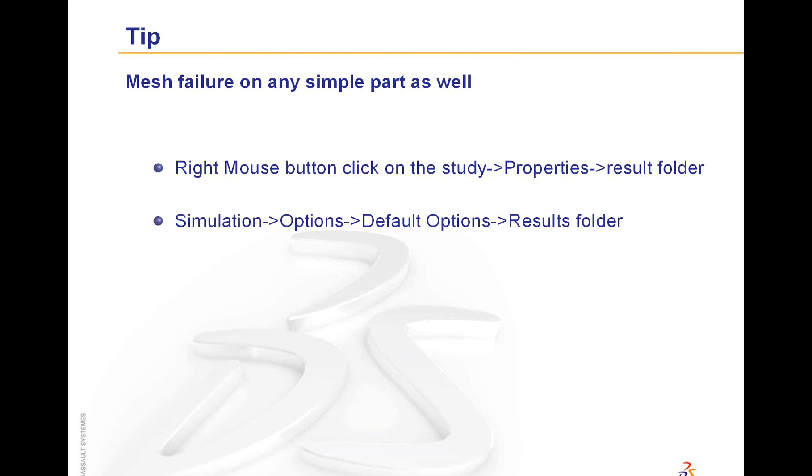Right mouse button click on the study properties, results folder. This is the folder where the temporary mesh files, or the files created during meshing, will be stored - ensure the user has read-write permissions there. Apart from that, we have simulation options, default options, results folder. There are many things I could discuss here, but these two are the key points. Do not miss out on them - the permissions on these two folders are going to decide the failure or success of the mesh.

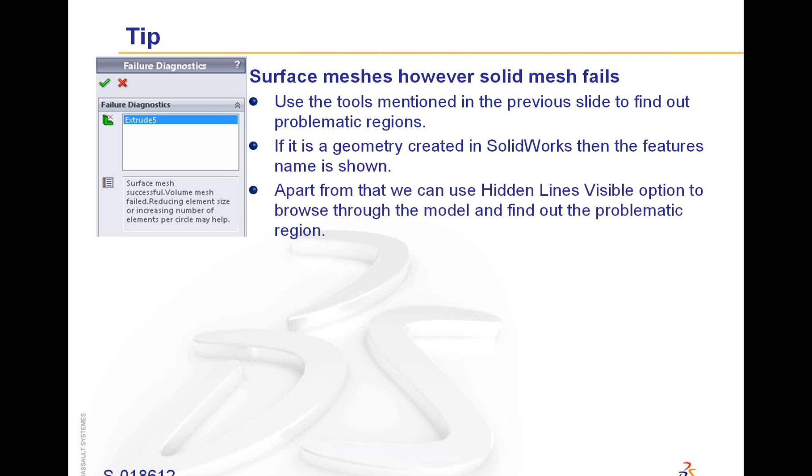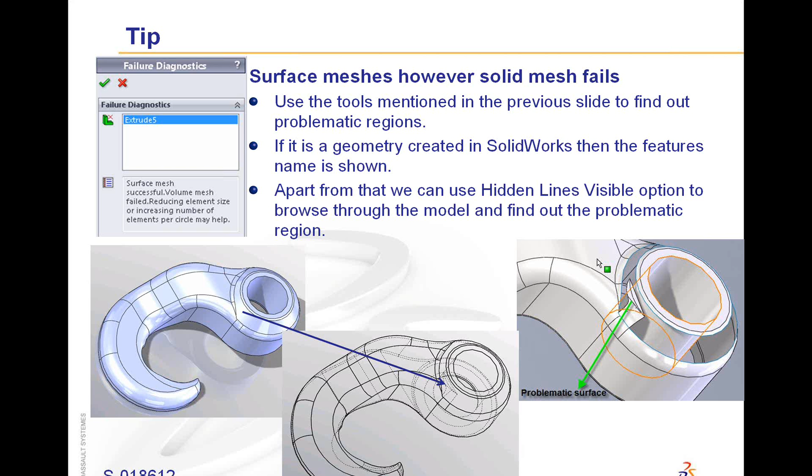However, if it is an imported geometry, then apart from the tools we have already discussed, the simplest visual tool would be the hidden lines visible option. Use this option and browse through the model. I have used this particular example. You can see it is a very good looking geometry, nothing wrong, perfect. But use the hidden lines option and you will find something fishy. You can see there is a surface inside the geometry, and that's the culprit in such failures. When you hide or delete the top surface, you'll see that internal problematic surface. So this could be one more simple visual option to find out problematic geometries.

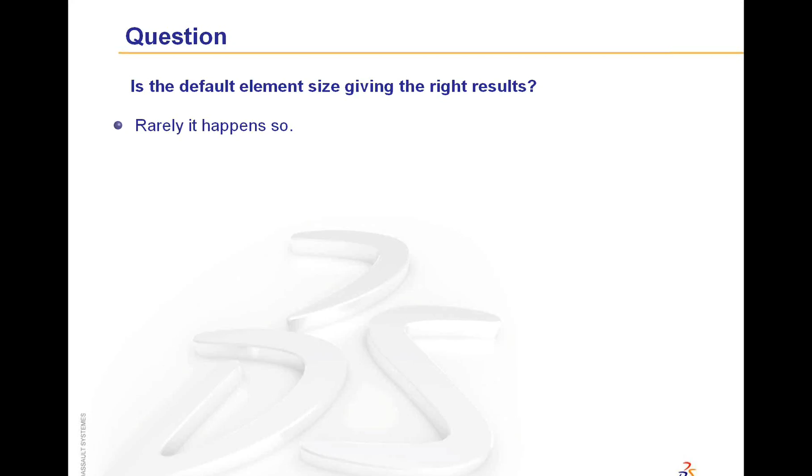Is the default element size giving the right result? This is a blind faith present in many users, wherein they say, I have set the mesh to default, why am I not getting the right results? No, it rarely happens that the default element size gives you the perfectly accurate result. It can happen, but rarely. It is only a suggestion.

Once you run the analysis with that element size, you may want to evaluate whether local mesh refinements are necessary to improve the result quality at stress concentration points. Do not miss out on that. We need to play around with the results, check the results. Am I getting the right results? We need to do enough iterations of the mesh to get the right, accurate results.

Now, the default mesh has a complex logic, which we have not shared anywhere, but using which it will arrive at a certain element size. It will mesh it with that, and that is the best way the model can be meshed, or the best element size with which it can be meshed.

However, I would like to highlight that when we move the cursor, it is multiplying the element size by 2, or reducing it by 2 when we move the cursor to the fine side. Even though this appears small, users do it blindly and end up with high element size and degrees of freedom. Do not do it. Use it properly, that's all I can say.

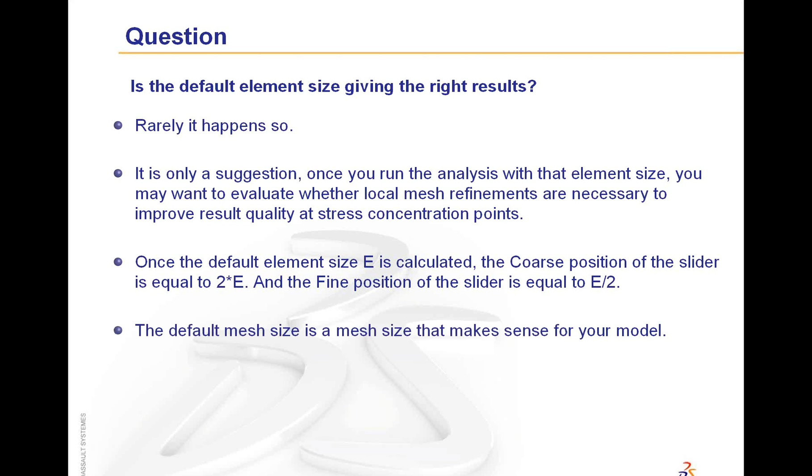I do not have much time to explain, but that's all I will say. The default mesh size is a mesh size that makes sense for your model. However, the user has to play around with the mesh to get the right quality of results.

Now this might appear to be a solver thing, but I have seen this problem creeping in due to improper mesh, where loads and boundary conditions are not transferred. This is a typical problem that can occur due to mesh, and hence I have included it. If the faces on which loads and restraints have been applied are very small, ensure that appropriate mesh controls are applied at those particular surfaces. If not, the mesh might miss out on those surfaces, the surface is not captured at all, and transfer fails.

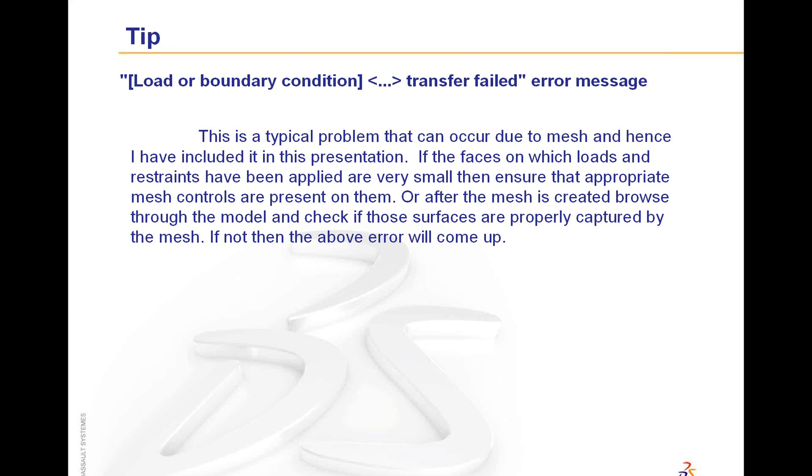Now yes, somebody might say it should automatically capture those things, but this is the reality at the moment. I would suggest applying local mesh controls if you are getting such a mesh error or warning.